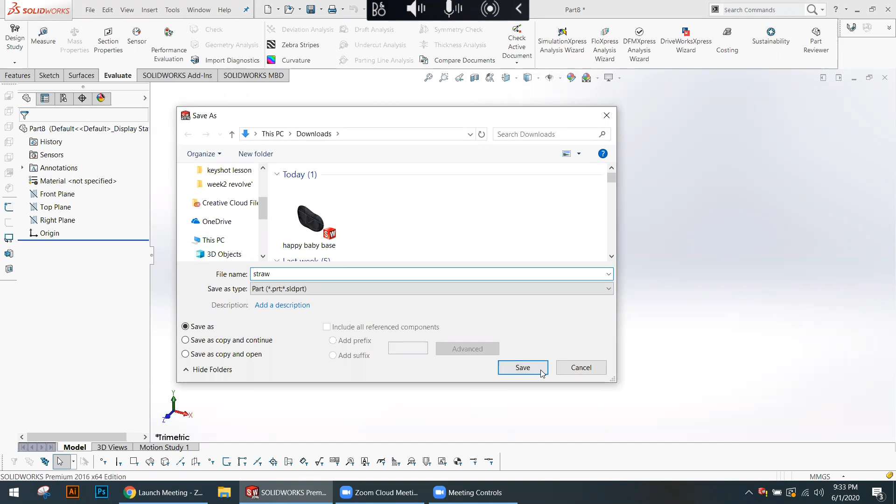Okay, so this is a simple sweep, just for you guys to get the practice of the basics. As we talked about it, we need two intersecting planes to build any sweep.

So we're going to start with our top plane and go sketch. This is going to be the base of our straw, which is a circular shape. And I click the origin, click out, and come back and measure this. Remember, this is a millimeter, so I would say the diameter of a straw would be about 5 millimeters.

So besides that, the sketch is black and defined, so we are done with the sketch. I'm going to come out of this. You can see sketch 1 is done. So now we need to build a sketch 2.

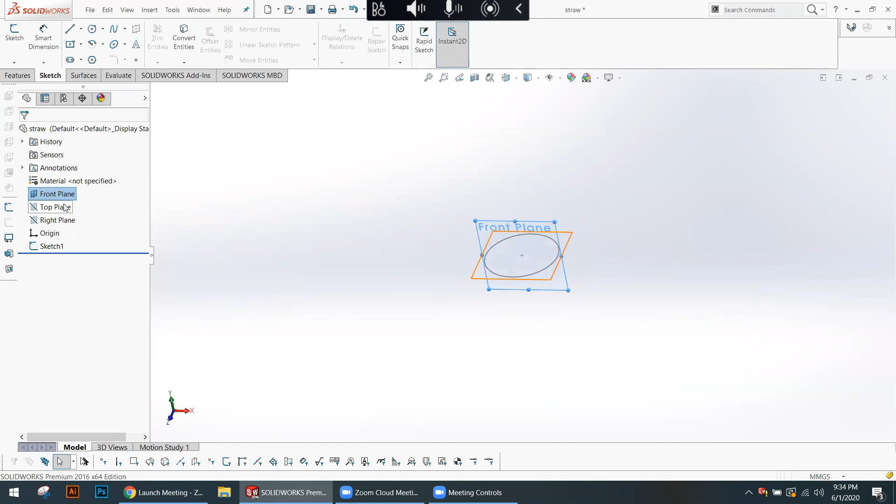And turn on these planes so you guys can see where I'm sketching. So we have our profile sketch or our basic sketch. Now we need to sketch a path on a perpendicular plane to our profile and tell the computer to have the shape follow that path. In this case, both right plane and front plane will work.

So we're going to pick front plane and click sketch. Notice this is sketch number 2, so separate from the first one. Press Ctrl 8, so I'm looking straight at it. And come use my line tool.

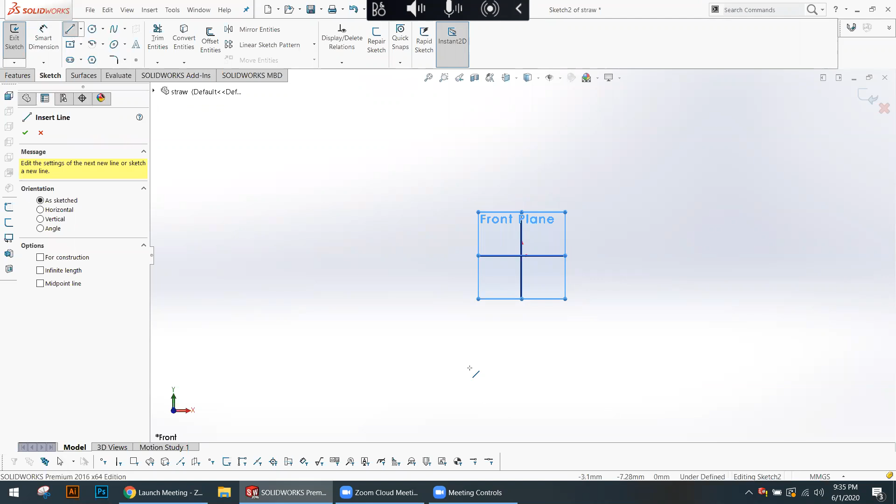The first point that you put down is the most important point. These two sketches need to have an intersecting point. So I use the center of the other circle as my starting point for the stem of the straw.

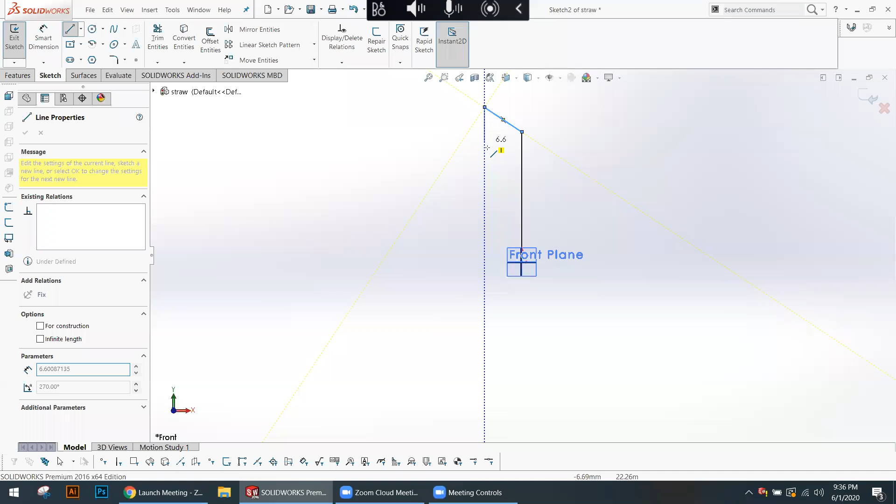I go back to Ctrl 8, so I'm looking straight. I go up, and the straw kind of bends to the side. So let's say, how tall is the straw? I kind of do this in inch because I know it better. Maybe it's about 10-inch tall.

So I can just write 10 and write IN, and the computer will calculate the millimeter portion of it. So you don't have to actually do the millimeter.

So it's a lot taller than I was expecting. Let's see, this is our base, this is our height. So maybe I will go with 8-inch.

Now also that means this portion needs to be a lot taller. And I put this one at... let's put it at 2-inch.

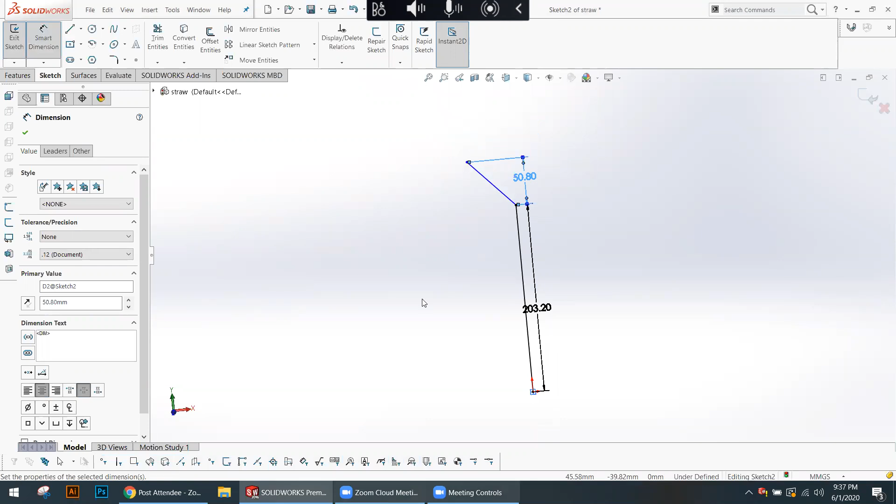Okay. Also, let's look straight at this. A straw usually doesn't have

a sharp point, so we're going to come in and do a sketch fillet here. Use our sketch fillet, I come in here. It's kind of small. We're going to go up with the number until it looks nice and smooth. Okay, that looks better.

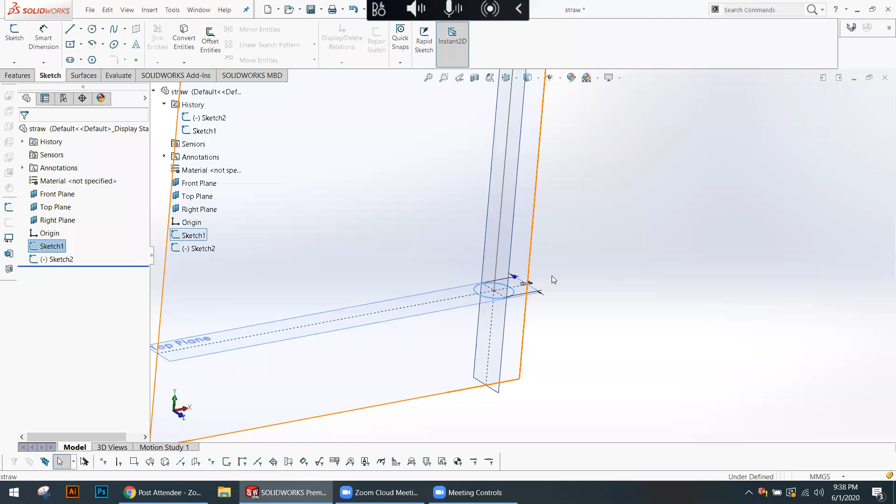So now our profile sketch is done. My bad, our path sketch is done, and we're going to finish and completely come out of this one as well. So if you notice, we have sketch 1, which is the circle right here. And on a perpendicular plane, we have sketch 2, which is that path.

Now that we have these two, we can make our sweep. So I'm going to go to features. Here we go, sweep is the third option on top, sweep boss.

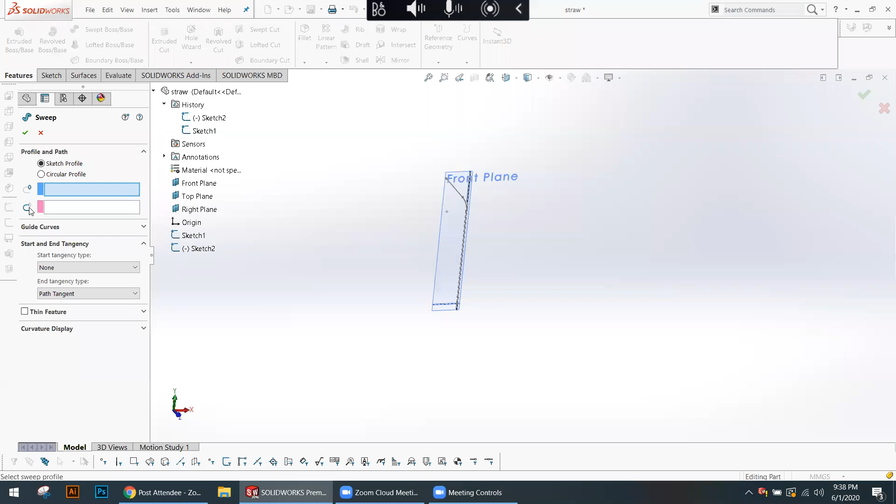And click this. As you notice here, it's asking you first for profile, right? This is the profile, this is path. So I'm going to pick the profile. Okay, now it switched into the path. So now I'm going to pick my path.

And as you can see, the sweep is built. The base is following that path and making the shape. So this is a simple sweep. I'm going to say OK.

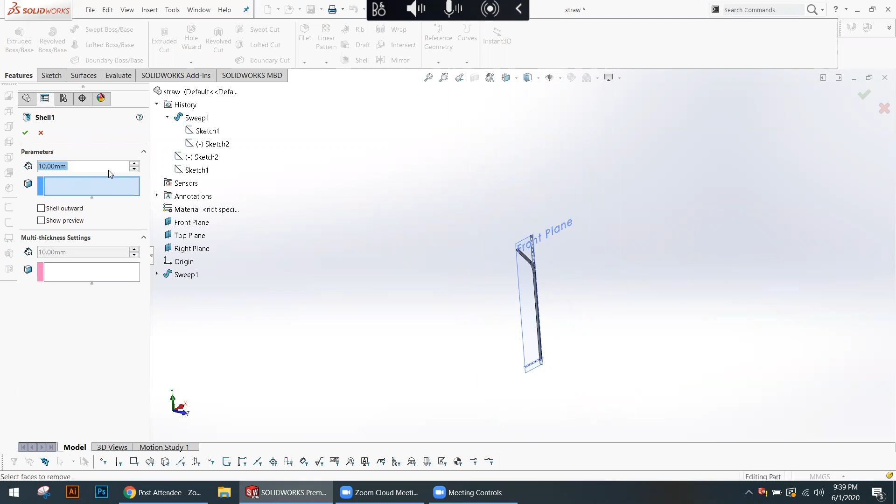And here's our straw. If you notice, this straw is filled, so we need to come back and shell it. So I use the shell tool. This is 10 millimeter wall thickness. It can't work because our whole circle was 5 millimeters.

So let's put the wall thickness at 1 millimeter. Click show preview. So right now it's hollowing it out but leaving the top and bottom in place. But the straw does not have those.

I'm going to select this top. Now you see the cut comes to the edge. Also, I'm going to select this bottom. So now when it cuts, we're going to have an open top and open bottom.

1 millimeter may be too thick, so I'm going to go back to 0.5 millimeter. That looks more similar to a straw.

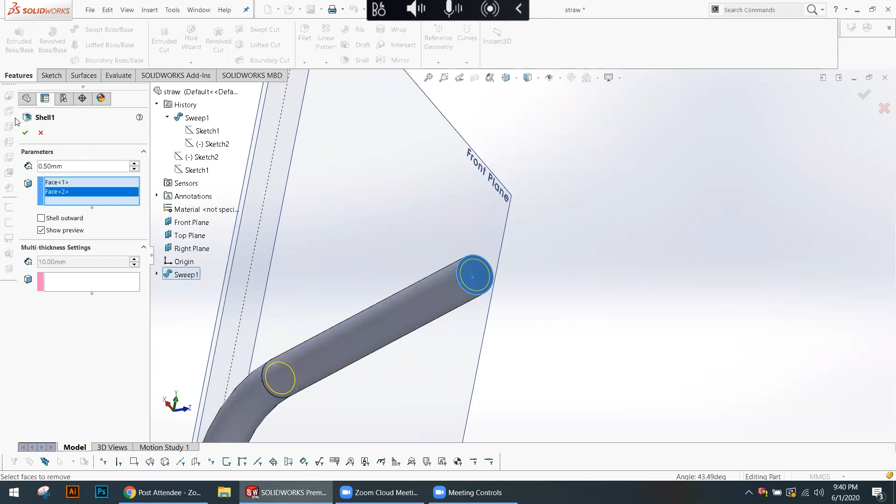Okay, here we go. So now we have the hole, and if you always like to double check, you can use your cross section tool and look inside your form, which is a great practice. Okay, it looks correct, and we are done. So make sure you save your file.

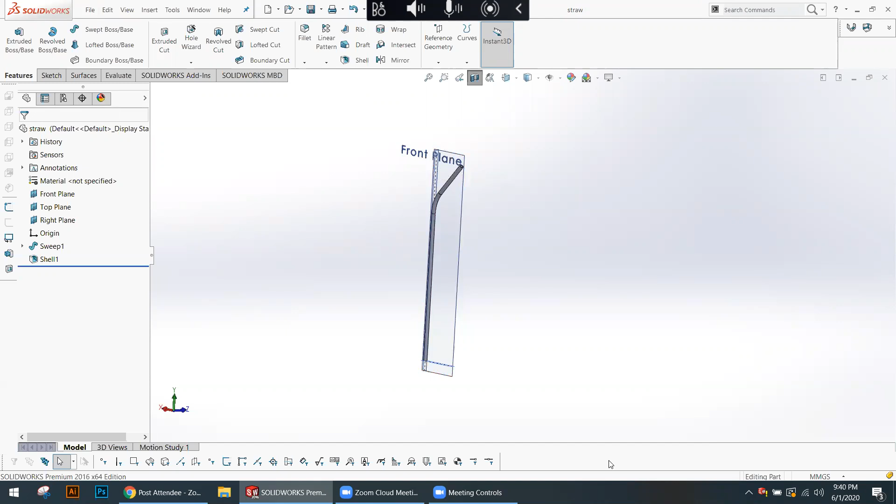Okay, so next lesson, we're gonna do something a little bit more complicated. We're gonna build a teapot.

So let's start a new file. Go to part. Check the measurements again. Okay, it's an inch, we'll stay in inches. And with this one, we have a picture to bring in. So I'm gonna go to front plane because we have a side view picture. And click on front plane.

Go sketch. I'll bring the picture in, it's easier to understand what we're doing. So sketch. Okay, so we are in the sketch mode on the front plane.

As before, go to tools, sketch tools, sketch picture. So we're going to look for our pictures. Here we go, this is the teapot we chose. Open. Okay, this may come in humongous. All right.

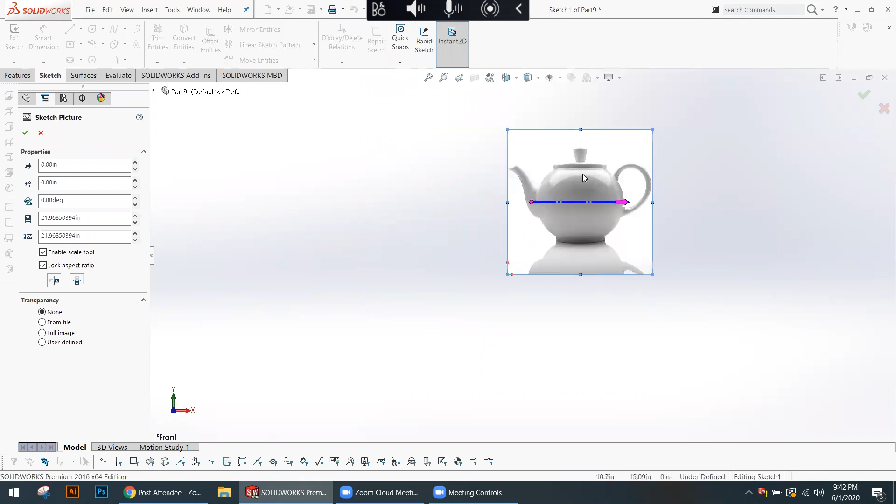So just looking at this image, we know this base part is going to be a revolve. This handle is going to be a sweep. This is going to be, for now, a sweep, but a better way would be loft, but we're going to use sweep. Also, that top is going to be a revolve. So we're going to start with this base part and build our revolve through the center.

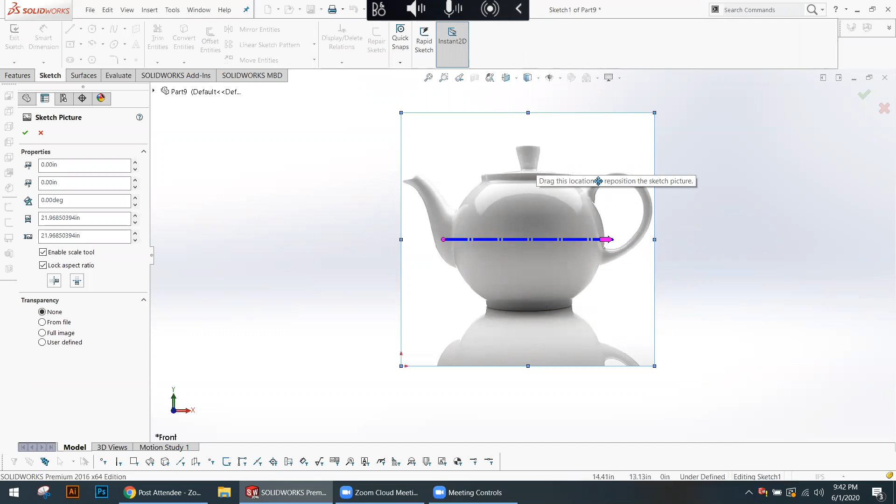To do that, we need a center line. So I'm going to check this. I'm going to come in and draw my center line. Okay, and measure it.

So a teapot is about 6 inches tall. I'm guessing it might be 7 or 5. So we're going to go with 6 inch. This is the reason why I came out of the image and measured my center line, because I wanted to know how to size this, since we need an actual measurement to figure out the correct size.

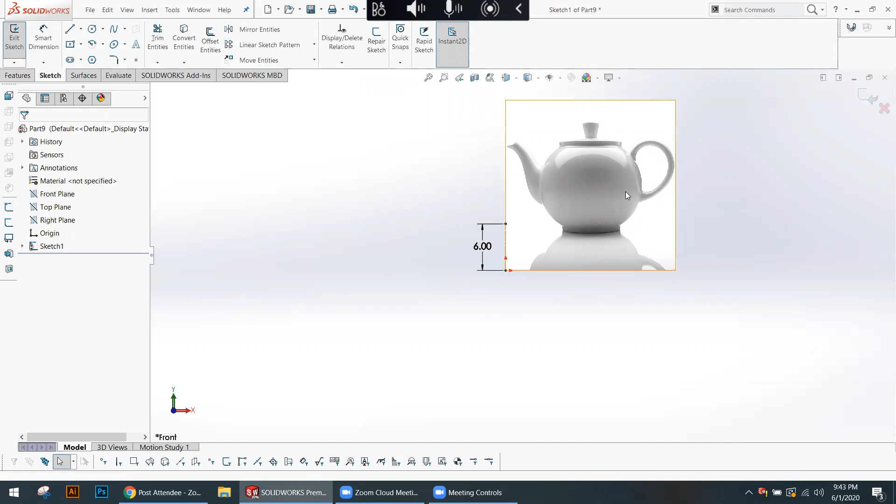Now I go back to the picture, I double click until this blue border shows up. Now I can move it. I want to try to center the teapot, grab the corner, make it shorter, a lot more.

So I'm measuring up to the top here to be 6 inch. Let's see. Okay. Okay, now I gotta go bigger. Okay, that looks about right. And say okay.

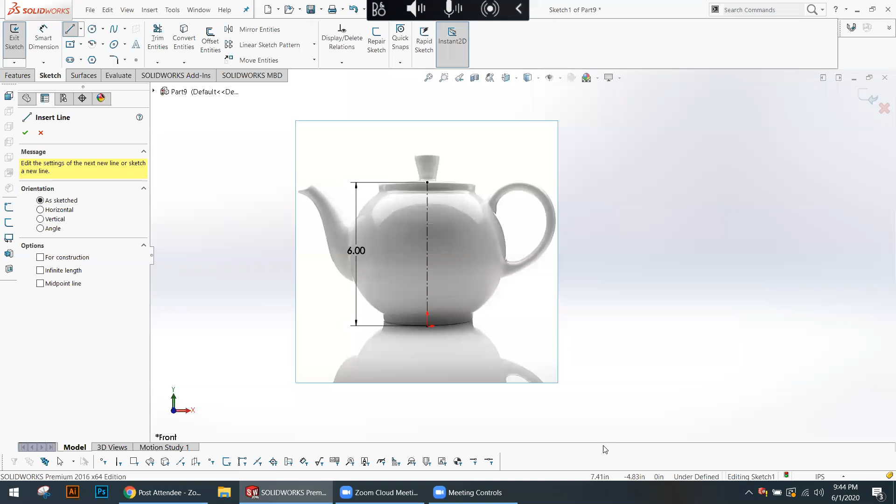Now our first move is to build this revolve. So flat on the bottom. As you notice, this is not 100% side view, there's a little bit of tilt in there. So I did the base, I came up a little bit for that. This looks like a very nice arc.

So I'm just going to use the arc tool, which we have here. I'm going to use a 3-point arc. We click on it. You guys remember a 3-point arc has 3 points: first one is the start of the arc, second one is the end of the arc, third one is basically the radius. So we'll start with that.

First, second, and this is the radius. So we're going to try to get as close as possible. Say okay.

I move this image down a little bit because I think that's easier to work with. Go up a little bit. So we may need to adjust things here and there, but because I had it at the bottom, there was too much curve happening there.

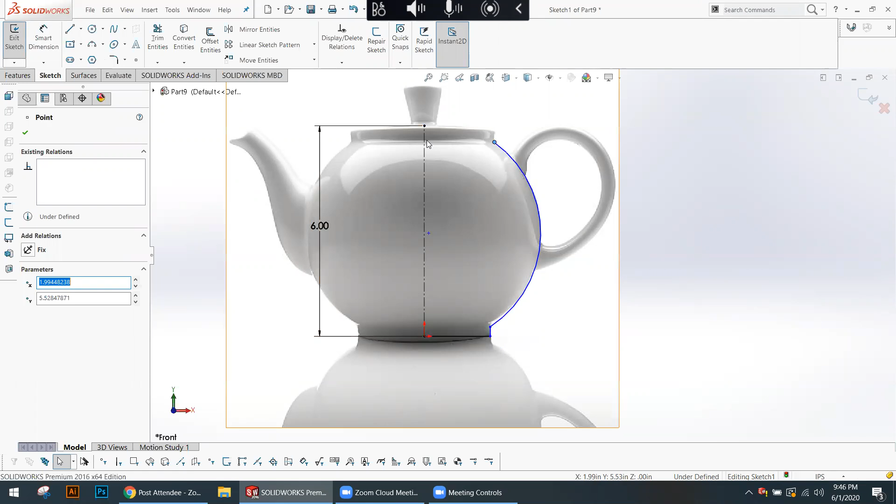These two kind of seem above each other. No, the base looks smaller than the top. I wanted to put a straight line here and make them even, but now that I pay attention, the bottom looks smaller than the top, so I'm going to keep it as is. Try to finish the sketch. Okay.

Here, and we're not going to close because this is hollow, we all know that, so I'm going to leave it here. Because this is hollow, we're just going to select one line and use the offset entity, so it offsets on the outside. Let's click reverse, make sure you have select chain on, so rather than just doing this one piece, it will do the whole thing. I click reverse. All right, that looks good.

0.1 is the measurement. Let's do 0.15, see if that looks better. It still is a teapot, so it's going to be more hefty. Okay, remember the sketch is not closed yet, so I have to come in and close this and close that. Okay.

So something I'm noticing here, before I go ahead and finish the sketch, I notice there's this cap that's sitting here. That means there needs to be a notch right here to hold this piece in place. So I need to come in and add like a tiny notch right there. I can just use my circle tool like that, so this will create a little notch. You could even go make a box like that.

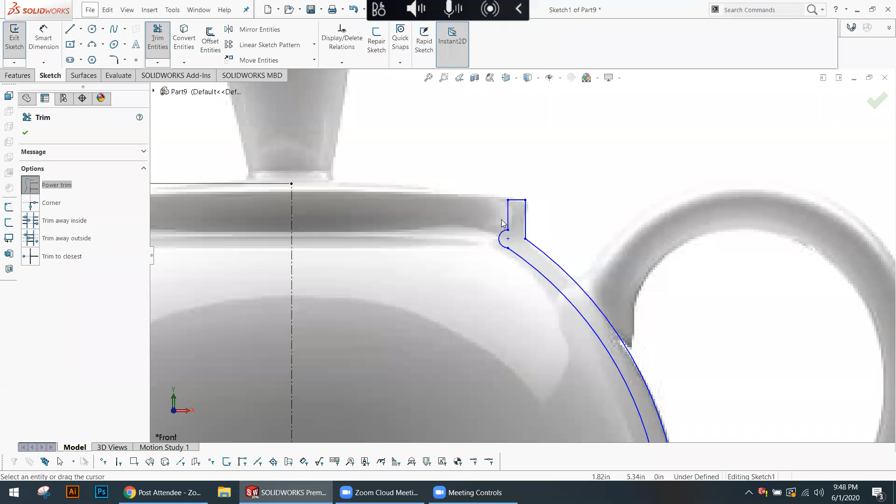Let's trim the extras. I went to the scissor tool and clicked power trim on. I click outside of what I want cut, hold down the mouse, and draw a line right on top. We wanted to get rid of those two, so now we have this tiny notch that will go all around and hold this piece.

We are ready for revolve. Feature, revolve. It's asking us which one is the axis. It's this one. And here we go. So it's open on the top, closed on the bottom.

Okay, nice, exactly as we want it. Let's select this to show so we can build the rest of that. So if you pay attention, this handle right here, that's a sweep, right?

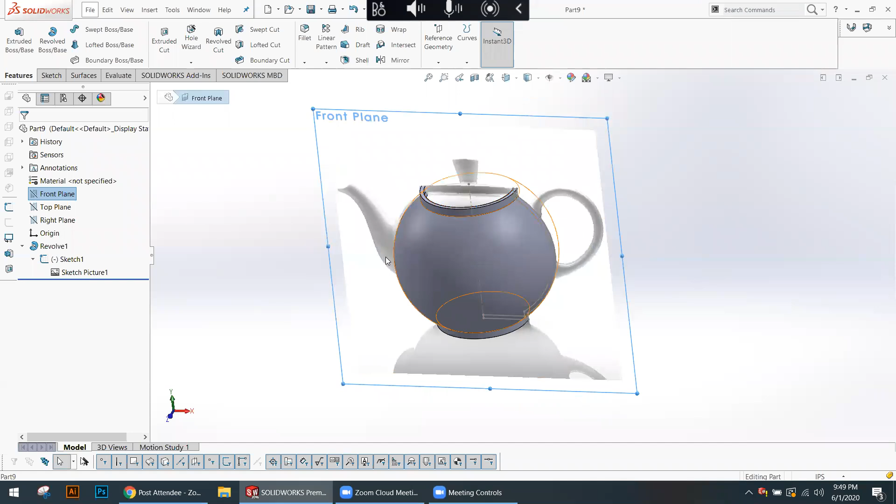But this sweep starts somewhere here, so if we have our profile sketch somewhere out here, we can do a path on our front plane because the front plane is going through the center. So we put our path on the front plane, but our profile is a plane that's perpendicular to that. Something similar to the right plane, but the right plane starts right in the middle here, and we don't need that.

So we're just going to start building a plane right on this space. To build a plane, you go on features all the way to the end, to reference geometry, drop down menu, and the first thing is plane.

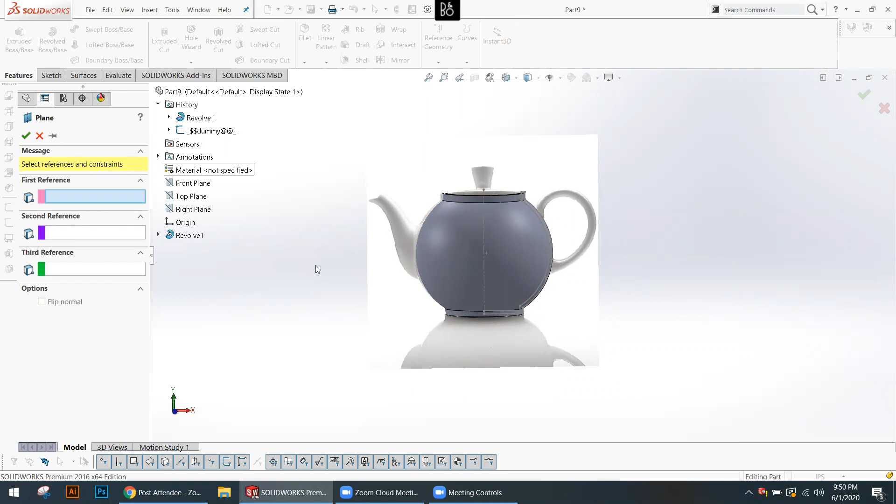When you want to build a plane, it needs a minimum of 3 references to pick that plane. We know this is going to be parallel to the right plane, so we're going to select the right plane. Then rather than give it a couple more references, we're just going to say it's parallel, and we're going to give measurements.

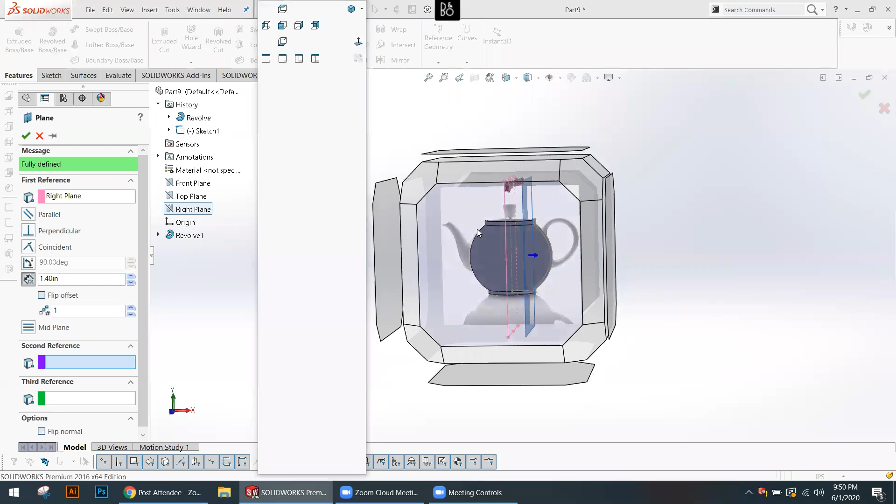Here is dimension, this is angle, this is dimension. You can pull it out to where you think it's right, or just go up with the spacing. If your plane was going the wrong way, you just click flip and it goes the opposite way. Keep going. We're looking to get about here, because we need to start here, come out, and come back in.

This part is okay, we're not worried about it because our path will go all the way back in here. But this profile, which is a circle, or I'd say more like an ellipse, needs to be all the way inside of the body. So maybe that looks about good, so it's 3.1.

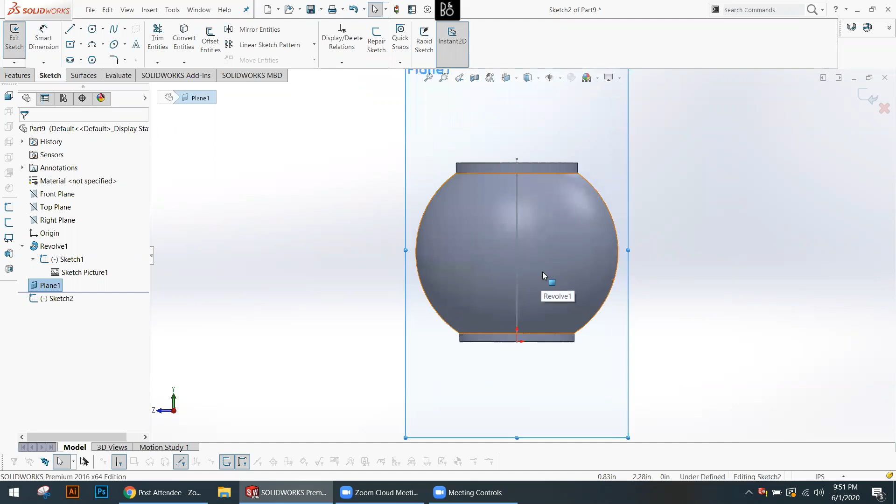I say okay, so we built a new plane that we can sketch on. We select this plane, say sketch, and press Ctrl 8, so we're looking at it straight. It's weird because we can't see the image anymore, but we can always go back and forth. We know that handle is more like elliptical.

We can go to the ellipse tool here, click the ellipse. You see this is the origin, so we're going to make sure we're on the center. I click, come to the right. If I go to the side, this ellipse is not going to look horizontal, it could be in a diagonal. So I click once, that's the major axis of the ellipse, and click the second time, this is the minor axis. Then press escape to come out.

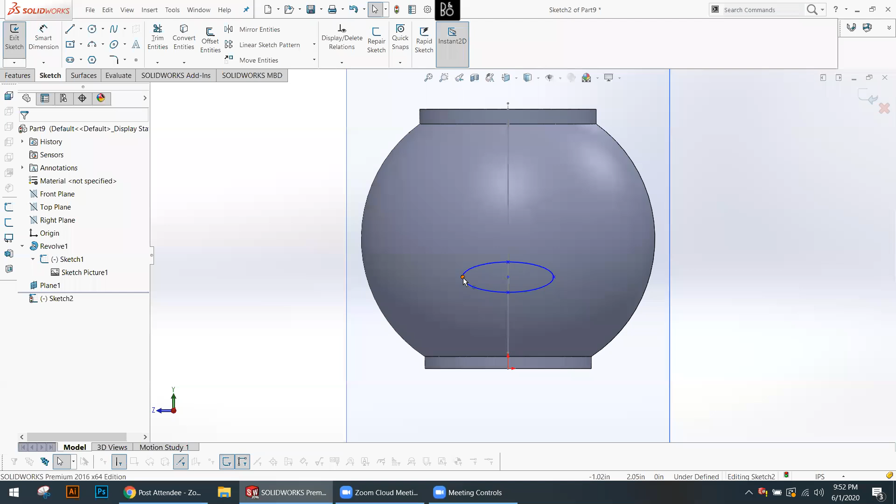So this will rotate, it's too flexible, it's open, so we need to come in and define this. I'm going to click that dot and the right one. I held shift, so I'm selecting both. On the left, we're going to put it horizontal, so now it will stop it from rotating. Say okay.

And come measure the center to the bottom. Says 2 inch, so I'm going to cheat a little bit. I want to rotate to the side, and look, all right, we need to be a lot higher. So maybe this should be 2.15, let's see, maybe even more, maybe 2.25. Okay, that looks good, I'll go back to my view.

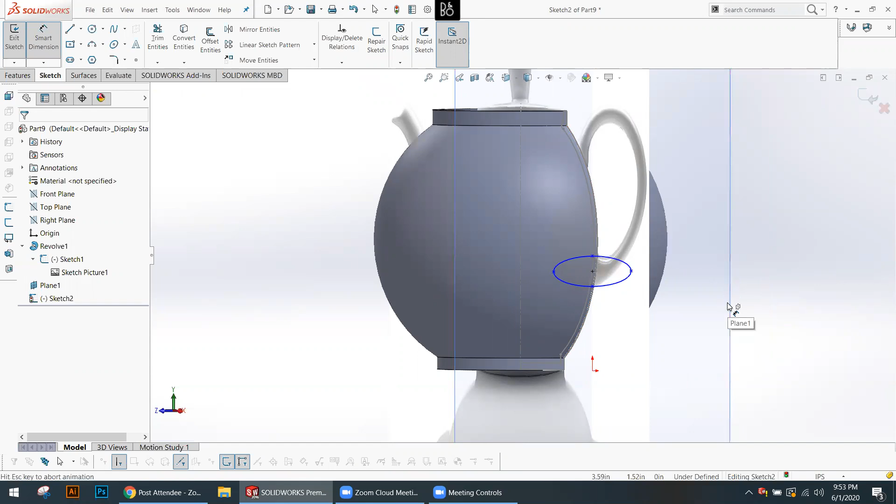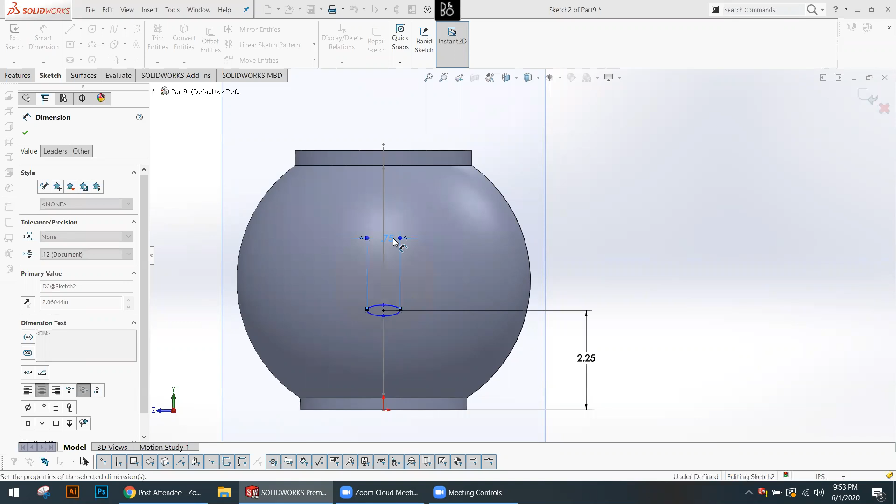This is pretty large, so we're also going to measure from that point to that point. Think of a handle of a teapot, it's about maybe less than 1 inch, maybe 0.75, like 3/4 of an inch. But it's definitely a little thicker than this, maybe 1/2 inch thick. Okay, let's look.

Don't worry about this thickness, this is a fillet that's going to come in. So we're looking at this thickness right now.

Okay, I'll go 0.8 on this one. It looks more elongated, maybe even 0.85. Okay.

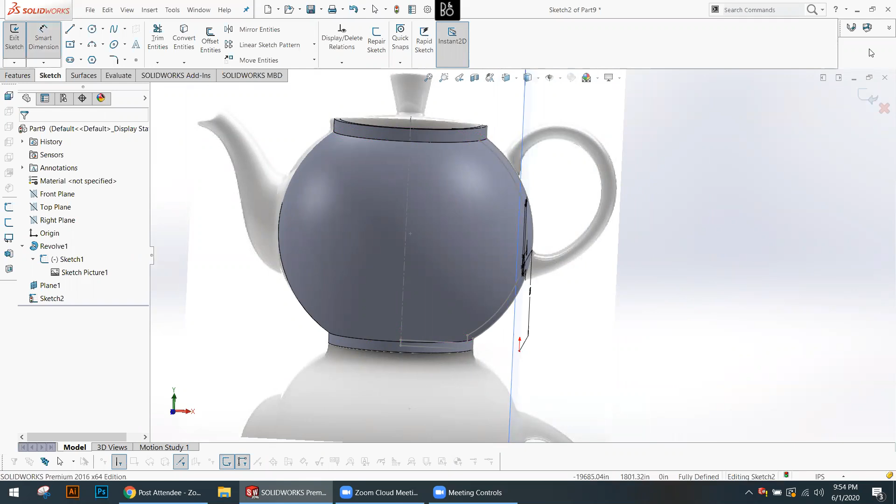That looks good. We're just going to leave the sketch here and come out, we're not using any feature on it. So that sketch is on plane number 1 - this is our sketch 2 on plane number 1.

Now we find the perpendicular plane to that sketch. So this would be our perpendicular plane, and it's going to follow that path and connect to that circle.

So we go on the front plane, we say sketch, Control 8. This time we're using the spline tool. Select the spline - remember, your first point needs to connect the sketch of the profile to the path. So I'm rotating a little bit.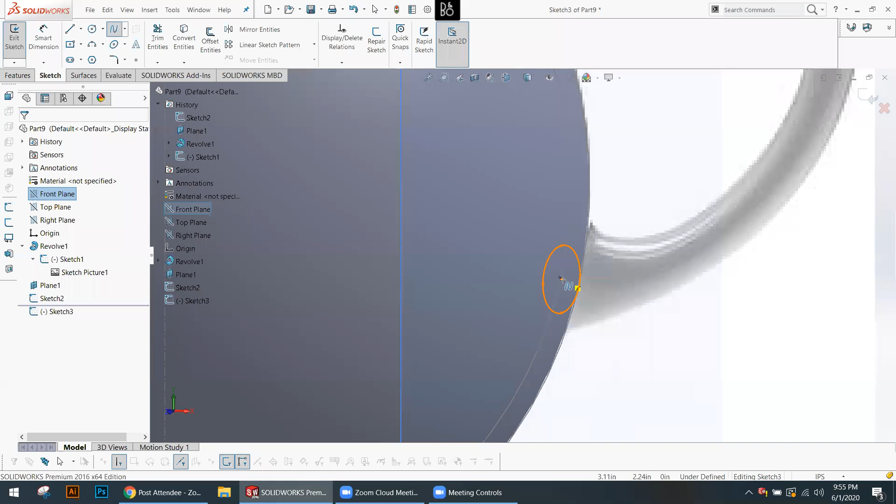By zooming, you guys see this ellipse? Stand on it - here we go, here's the center of it. So the first point you're clicking is the center of that ellipse.

Okay, and I'm going to zoom out and press Control 8. Now I know it's connected, so all I have to worry about is following this form.

Make sure you don't stay on the edge - you're going to come in because we need to fillet around the edges. I'll get rid of the axis later. Come in, press escape, and use these handles to make this more similar to the shape that we see.

And we're down here. Okay, that looks about right. Notice I'm in the center of this shape because I selected this path to connect to the center - that's why I'm trying to build my path through the center and not an edge on either side.

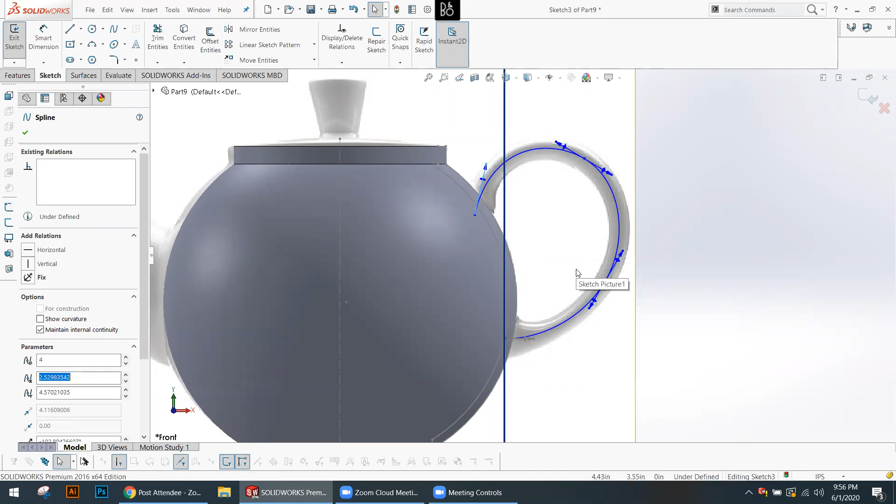Looks good, we're done with sketch. I want you guys to see - here is our path, here is our profile.

So now that we have the two sketches, we can go to features, use sweep. First question is our profile, which is the ellipse. Second question is the path. Perfect - all right, so we have our handle done.

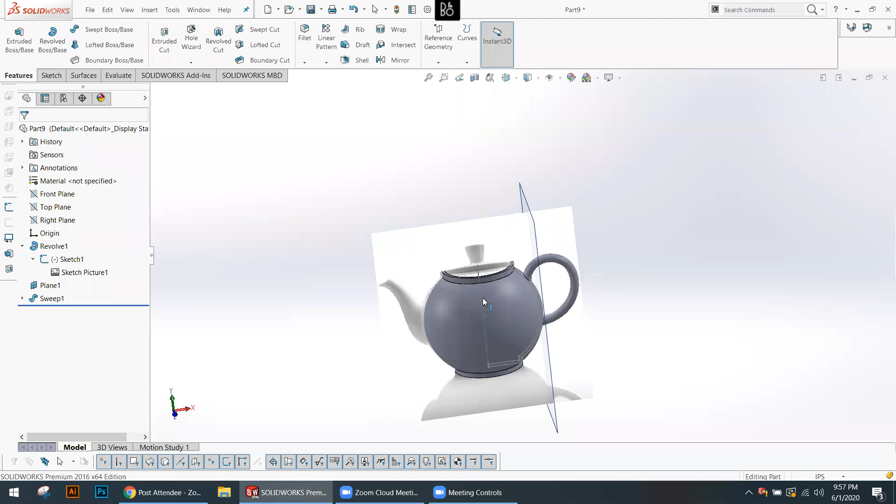I know this is sticking on the inside, I'm gonna come in later and fix that. We'll do the same thing on this side as well, but let's make the top piece for now. Going to go on the front plane.

Okay, I'm gonna cut this shape because I want the top to fall in there. Can I say okay? Did I say okay? Yeah, it just doesn't show because the picture is covering it, but it's okay, this gives me enough information.

Since this is also a revolve, we're going to use a center line and our line tool. So we're basically just going to come in. Okay, maybe I should have gone higher up a little bit.

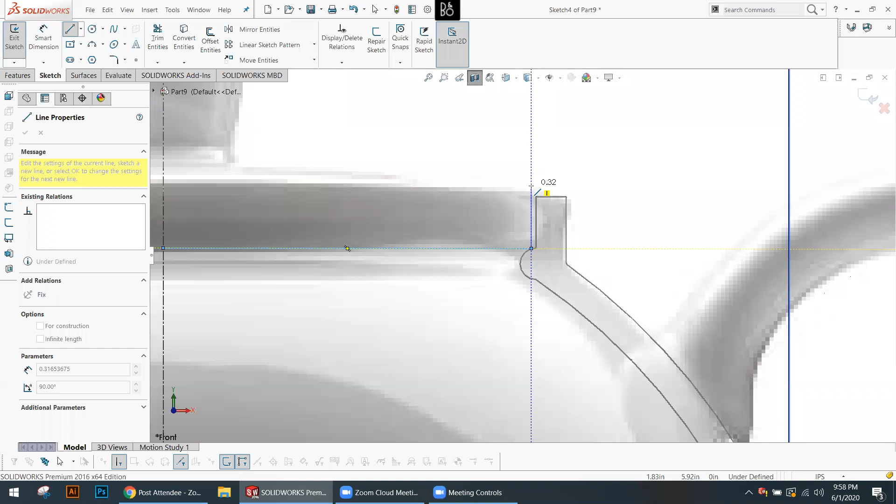It's okay, we'll use a fillet down here. And you can make it flush if you like, or go a little bit above. Okay.

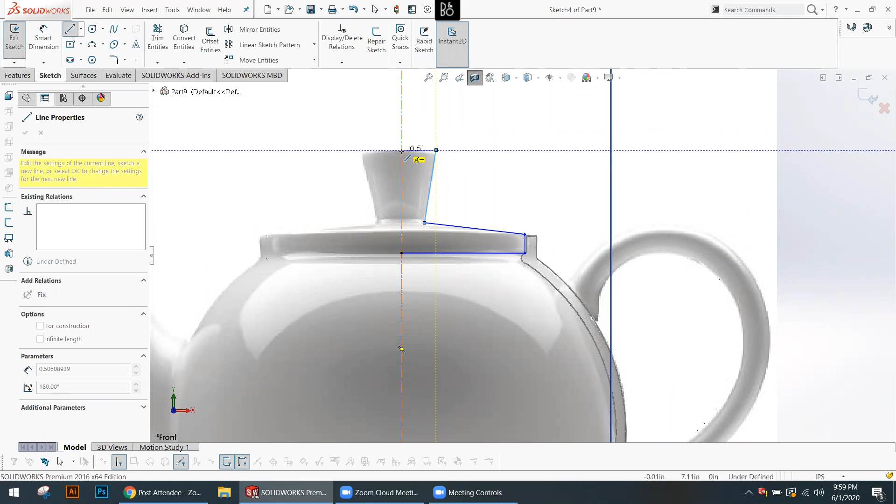Here's this. And that looks flat to me. Okay, all of these need fillet, but before that, I'm going to measure

from center to here - it's 1.82. Okay, from this point to the center, 0.34, and maybe this top one, not the angle, just the height.

Also the height of the whole thing. Okay, so this gives us enough information to go by. You could also do this angle if you wanted to.

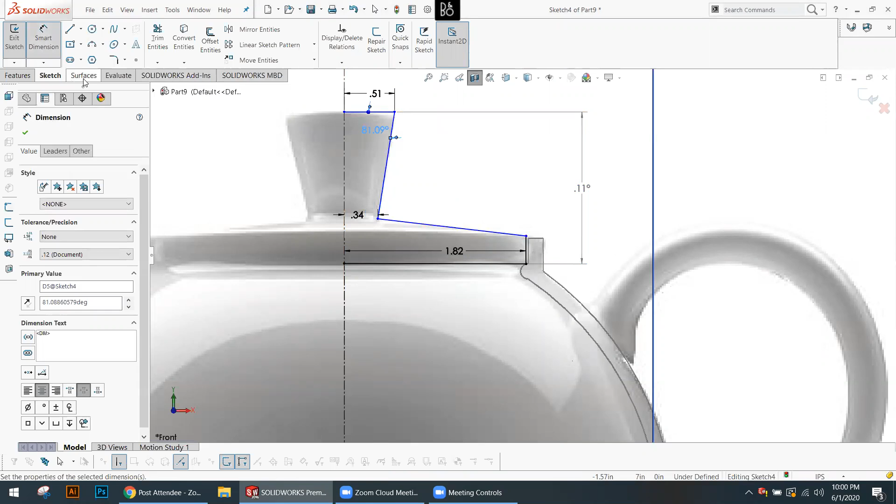And now use the fillet tool to smooth out. You can do this also after you do your revolve, or do it here. Okay.

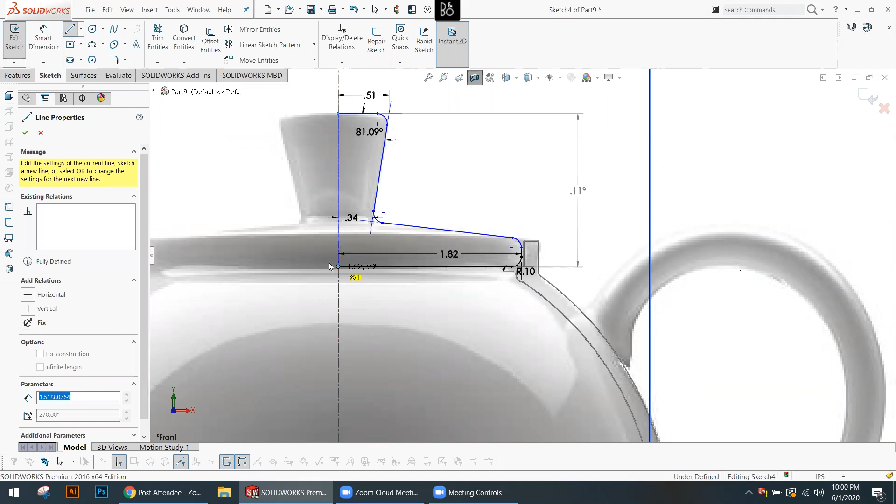One thing you notice, I forgot to close my sketch, so I'm going to come in, click and close the sketch. Now we're ready for our revolve.

Okay, very good. Say okay, and then come out of this cut so we can see. All right, almost there - we only need the spout.

So we'll do the exact same thing we did for the handle for the spout. First thing we need is to build a plane here, build our profile, and then use a perpendicular plane to build this path shape.

So another way to build a plane, let's turn on our right plane to show. A quick way is to go stand on the edge. When you see these 4 arrows showing up, hold down your control key on your keyboard, click and drag.

There will be a little bit of lag time, so you just have to be patient with it and wait for the second plane to show up. Then you can let it go.

So again, what we did was we went to the edge of the plane. If you're in the center and nothing shows up, you need to go to the edge and wait for those 4 arrows to show up. Hold Control on your keyboard, click and drag while holding Control.

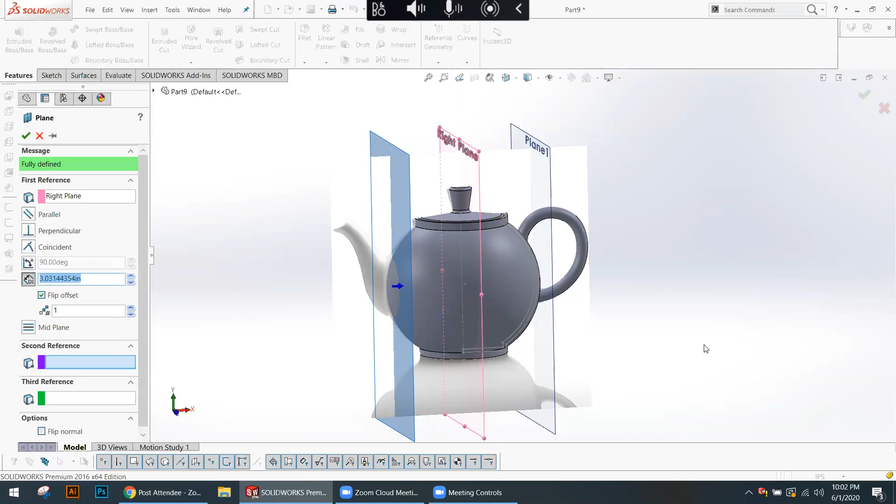And I think that looks about right. Let me look - yeah, that looks about right because it has to go all the way in here. Okay, say okay.

So we have plane number 2. We're going to use our sketch - this is also an ellipse.

Other way. So I'm still using the center as a guide. I'm going to click—maybe here is the center of my ellipse. Go up, click once, and click again. Okay, same thing as before. We're setting these two points, holding shift to be horizontal.

Then I'm going to measure this—1.5 for now. I'm going to rotate a little bit to the side using the arrow key on the keyboard. Again, I'm really low, so I need to go up, going back. Let's measure from the center to the origin. This is 2.36—let's do 2.5.

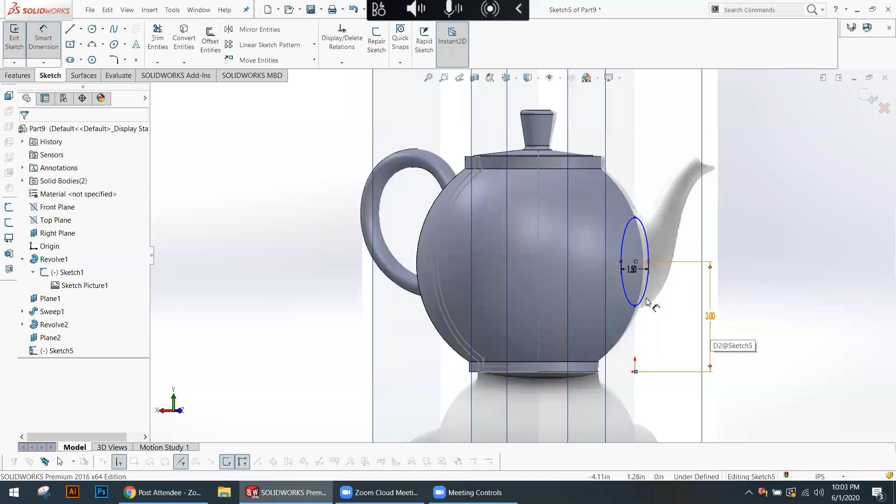Okay, looking good. Maybe even more—so maybe 3. That's much better. And the height actually looks correct. Let's see, and narrow this down a little bit.

Here, here. 2.25, just so it's an even number.

Okay, so Control A. One thing we just need to talk about—this is thicker than that, I know, but with sweep we're going to have the same thickness all throughout. So we're just going to accommodate for the fact that this is a sweep and we're not using a loft tool.

So as it follows through that S-curve, it will get smaller, but it's probably not going to get that small. So I'm trying to go smaller here a little bit and a bit bigger here—just to be somewhere in the middle, 2.5. Okay, that's better.

Okay, the sketch is also done. Here it is—it's sketch number 5. And as you know, we're going to have to build the path for this now.

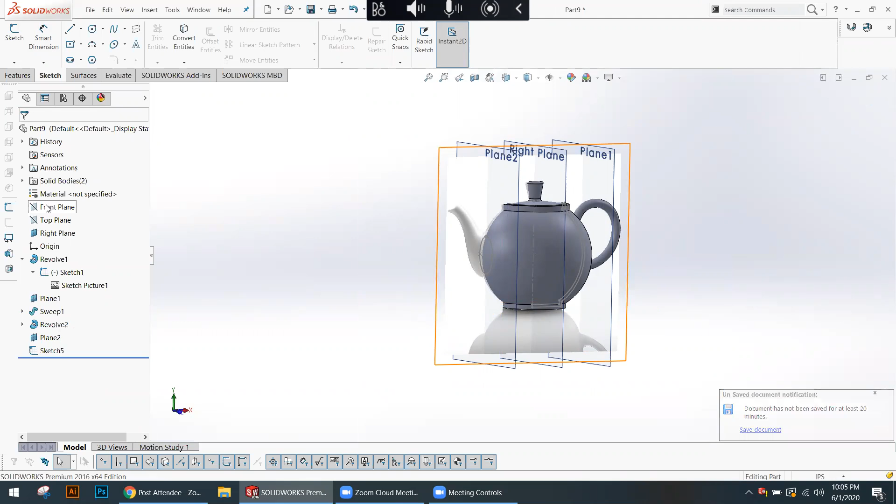So I'm going to use a perpendicular plane, which is the front plane here. Here you see it's crossing that. Say sketch. Okay.

We're using a spline tool. As you remember, the first point needs to be the center of this ellipse. Here we go—so we have to rotate a little bit just so we can see the center. Here we go, right click. Now press Control 8 so I can go back to this. All right.

Something like that—notice I'm going past because we're going to have to come in and cut this shape, so I'm going beyond that. And maybe a little bit higher this way. Okay, if you have really sharp points or curves, the computer may not be able to follow this shape through that path and will give you an error message.

So you need to make sure you don't have super sharp turns. Okay, maybe that's better. I don't know how it will look until I try to sweep. Coming out of the sketch, we have our path and profile—going to feature, sweep. There we go.

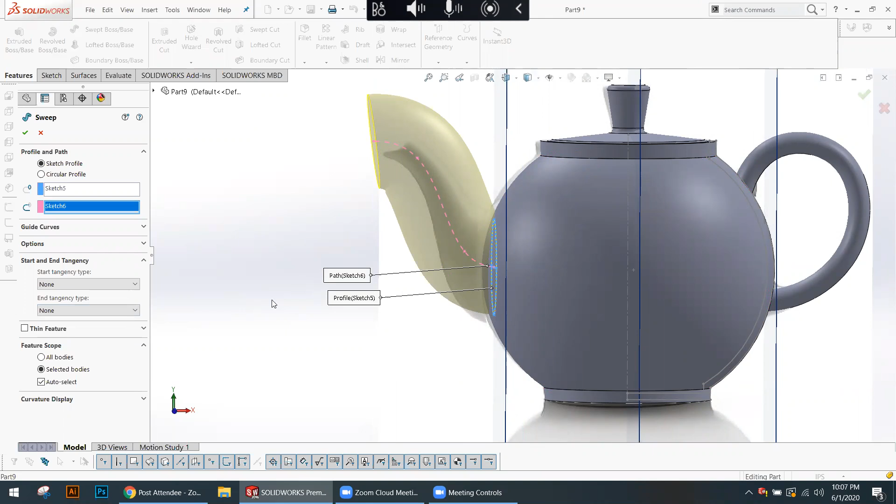Ooh, this is chunky. Okay, so this is way too large, so I'll go back and make it a lot smaller. And also it's going a bit thicker than I expected. Okay, we can always go back and thin this up and see what happens.

Another option we want to talk about—we know this is hollow, right? So we could always use this thin feature. The thin feature will build a hollow shape. But I think right now my curves are too small for that path and it's having a problem with it.

So let's go back to my path sketch and edit. All right, so this needs to come out more. Maybe—there we go. I have to just change the shape just a little bit, so it's able to... maybe I'll just go straight up this one. This is still a sharp point.

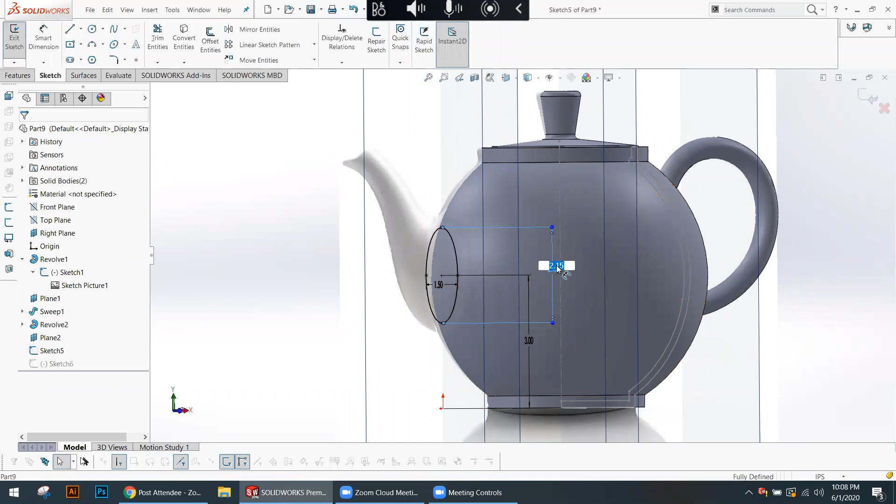I edited that. I'm also going to come edit the sketch and make it smaller—make this 2-inch tall, maybe make this 1.25, so it has an easier time following that path. And some of this we're going to get with the fillet, so it's going to add thickness there.

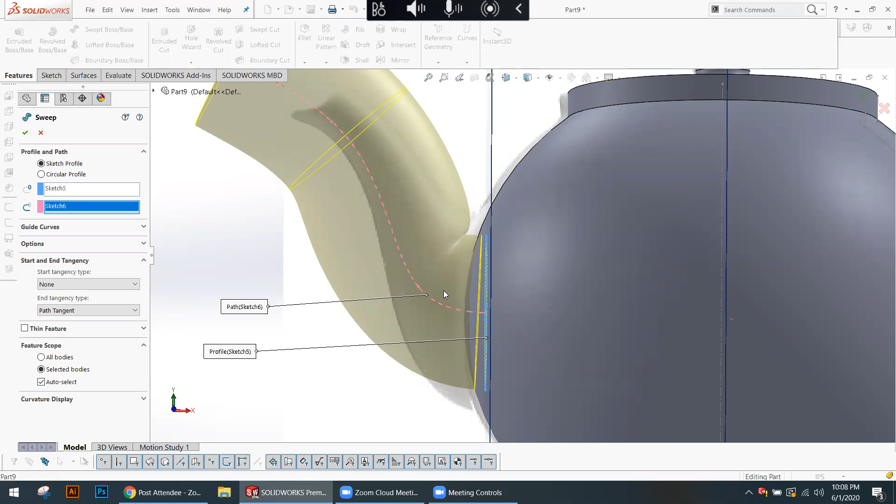Let's try this now. Sweep. Path. That. Okay, this is too sharp—you guys see how there is a pinch? I have to come in and bring this lower. The rest of it works out.

It's still gigantic—I'm going to go a lot lower with this number. Okay. A simple way to edit your sketch is to double click on it and it goes into sketch mode. So here, from the 2-inch, 1.5. So actually going really small now, and this is going to be 0.75.

Because I put the center at the correct place, every time I'm switching these the center is not changing, so my connection to that path is not changing, and we can update as much as we like. Okay, now I'm going to double click on this.

So I had an issue here—it was too sharp, so I'm going to open that up. Let's see what happens, maybe it will work, maybe it won't. At this point, we don't even need this third one. Okay, let's try it again. Sweep.

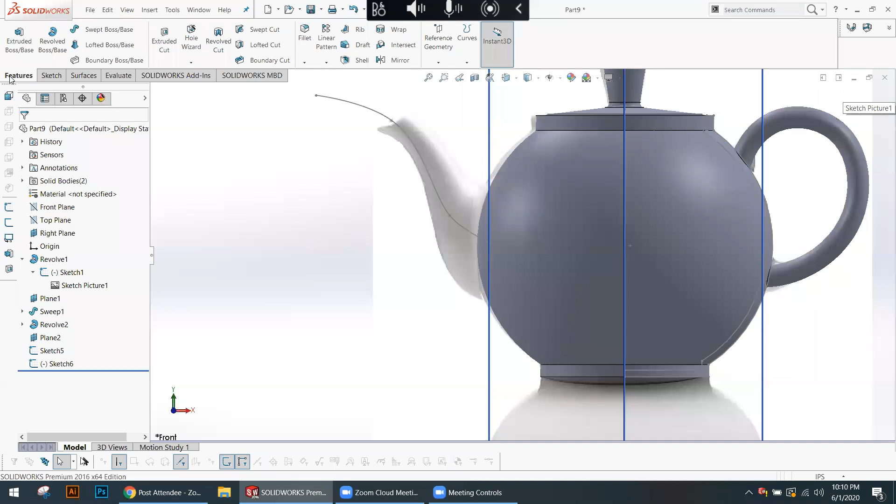Okay, it's better, but there's still a kink here. Let's go—yeah, I can't go up here. It almost needs to be just very smooth. This time, there's a small handle here. Maybe I can play with that.

Okay, that's definitely too sharp. I don't need this many points. At this point, I'm just going to delete one of these points. Maybe I'm not in the sketch mode.

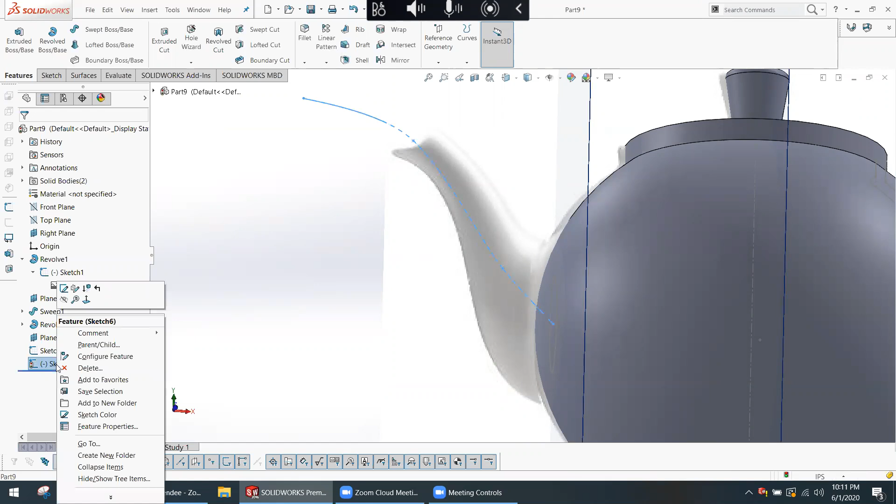I came out of a sketch for whatever reason. Okay, now we're in here. See? Okay, now that's deleted. Can use this. And bring this lower, and bring that lower.

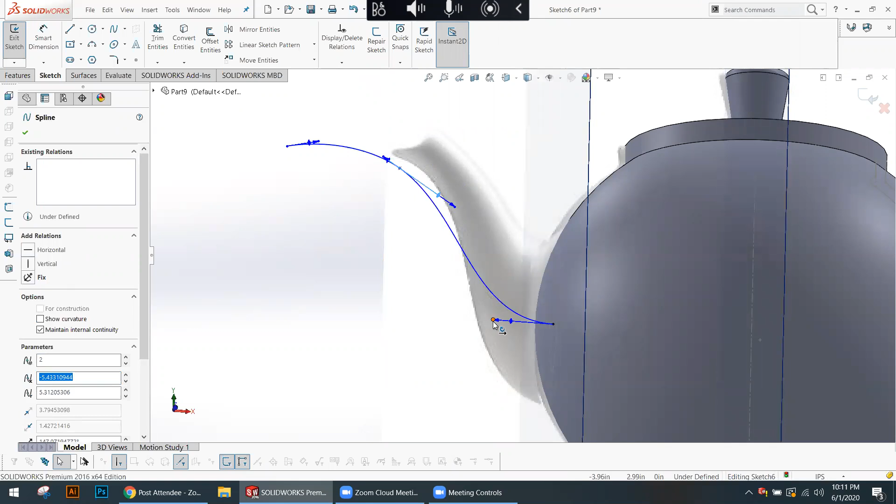And let's see what happens now. I know we're not following that, we're just coming down a little bit more. But hopefully this will work. See? Sweet. Okay, much better.

So we're gonna have to come in and cut it somewhere here and make it thicker here. This is still a little bit larger than I would like. I'm gonna say okay to this.

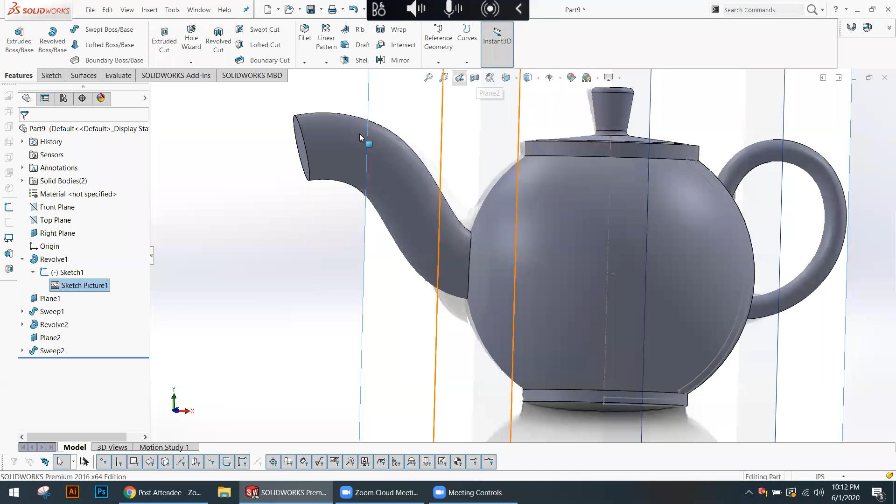Now to cut this part and look at the section view. So we're just gonna come in, you can see this, come in and cut, maybe something like that.

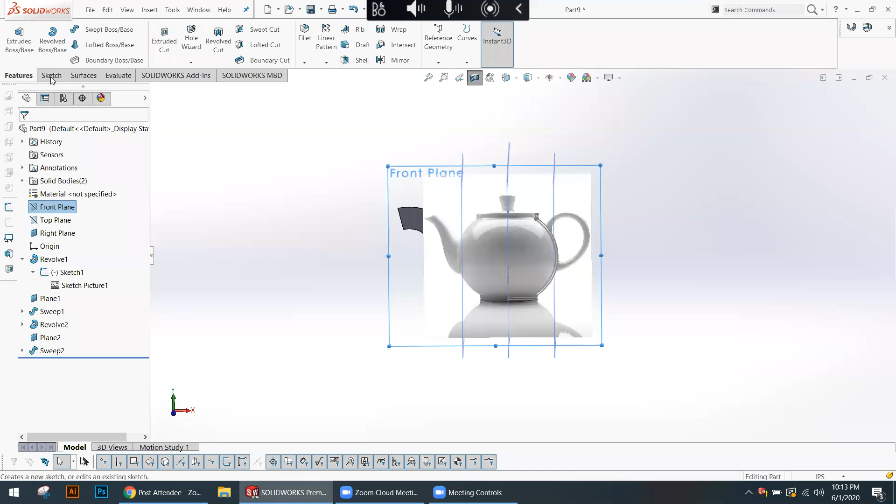So to cut this way, we need to use our front plane. Sketch and use our spline tool. If you can see, this kind of curves and goes out.

So ours is, let's rotate, it's like this. I come cut the top, maybe from here, and go out. So I use 3 points. Use this, go a little bit this way to match the lip looking thing.

Okay, this is curving in too much. Come in, smooth this out. Okay. Hopefully this will make it look a little bit smaller. Again, we're using not the best tool to build that form, and we knew that from the beginning, which is okay.

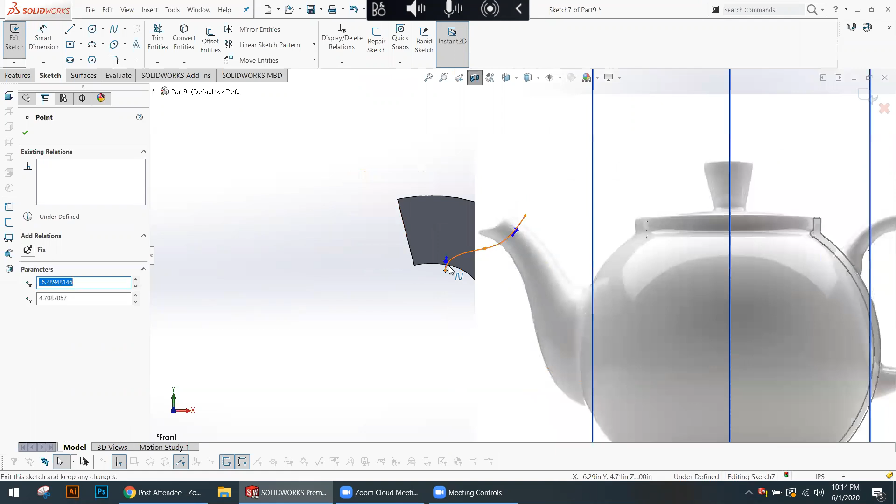Okay, so this is going to be my cut line. So I'm going to come on this side and look at this cut line. So maybe if I go down this way, here we go, that would actually look better. Okay, we'll do this. There we go.

All right, so this is a cut line, but my sketch is not done. You have to come in and make a closed path that contains all this top portion in it. A good practice is to still put a little bit of measurements so it won't collapse on itself.

Okay, I'm done with this feature, extrude cut. So for this one, we're going to use mid plane so it cuts on both sides. Here we go. Nice.

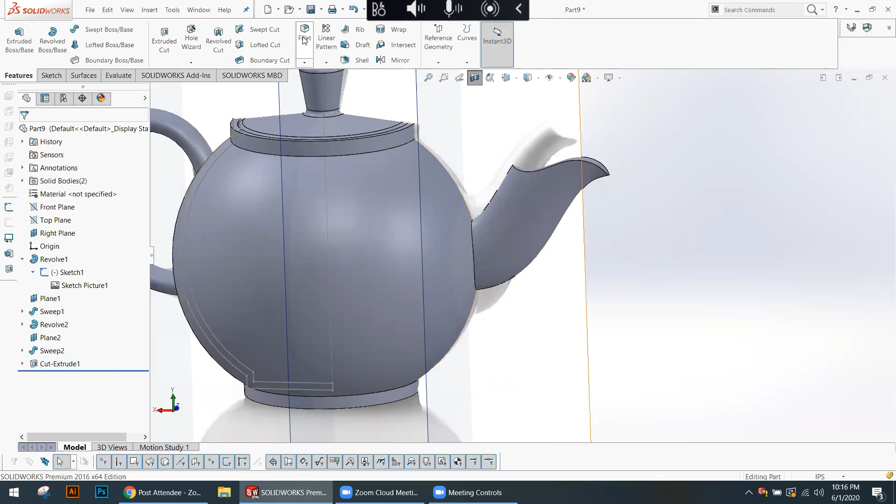Okay, and another part is to put like a good fillet down here, a lot larger, so it'll help our shape to be similar. That might be too large. Let's do 4. Okay.

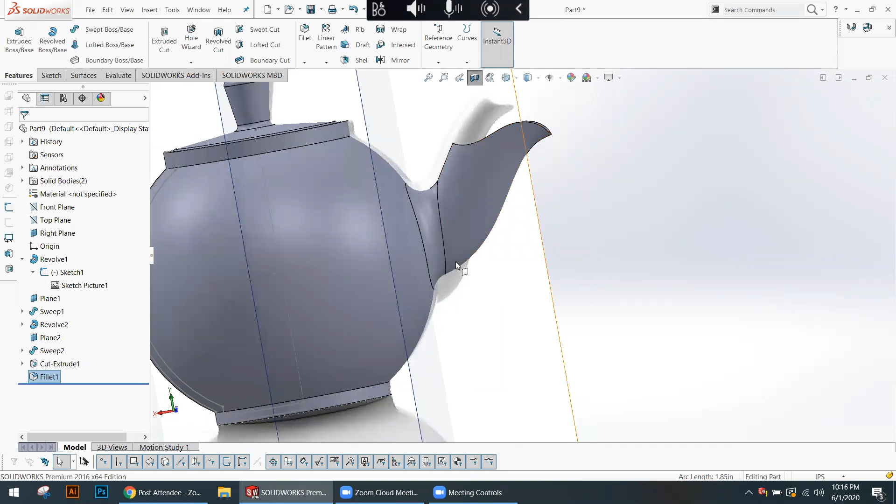I want to go back and make this ellipse, this base, a little bit smaller because it looks too big. So instead of 1.5, we're going to do 1 inch. All right, much better, a lot more manageable, right?

We can go back to this fillet and make it larger. We can go up if we want to. I don't know if it looks good. It's about 1/2 inch. See? All right.

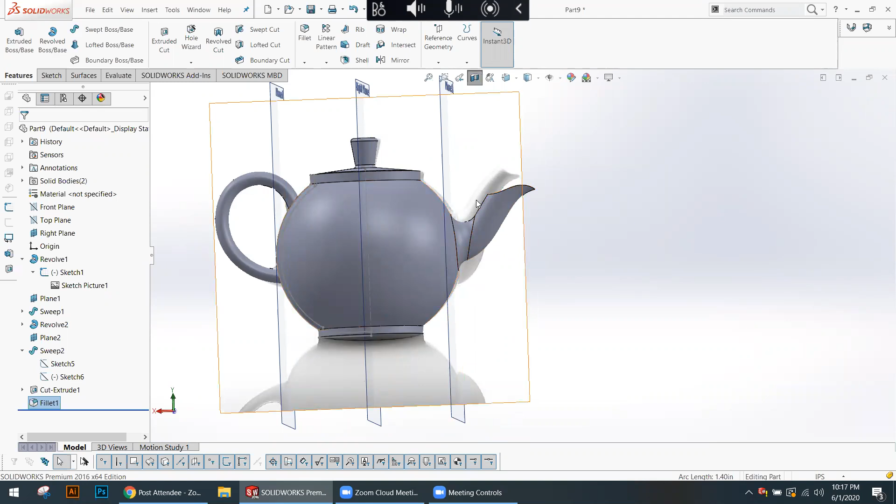Again, this is thicker. That's okay because we're using a completely different tool than that one. Also need to put fillets here. So go fillet. That's too large. And come down to maybe 0.25. That might be still too much. Maybe just 0.2. Say okay.

Right, that looks good. I go out of the section view and I hide my image. Okay, let's see what we're working with. I don't love this piece. That's okay. So we need to hollow out this thing, right?

So I'm going to use the shell tool. I need to see the other side too. So I'm using shell tool, and select this top here and this piece and see if that works. Show preview. Probably doesn't work because it wants to shell this whole thing. Okay.

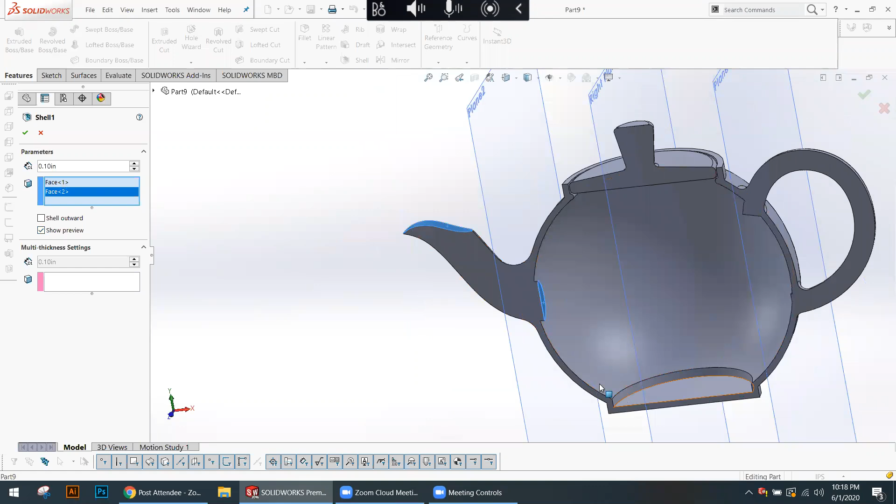So our other option is to make this sweep a thin feature. So we talked about it a little bit earlier. Let's see. It doesn't give us the option of a thin feature anymore, because we've already built it. Okay.

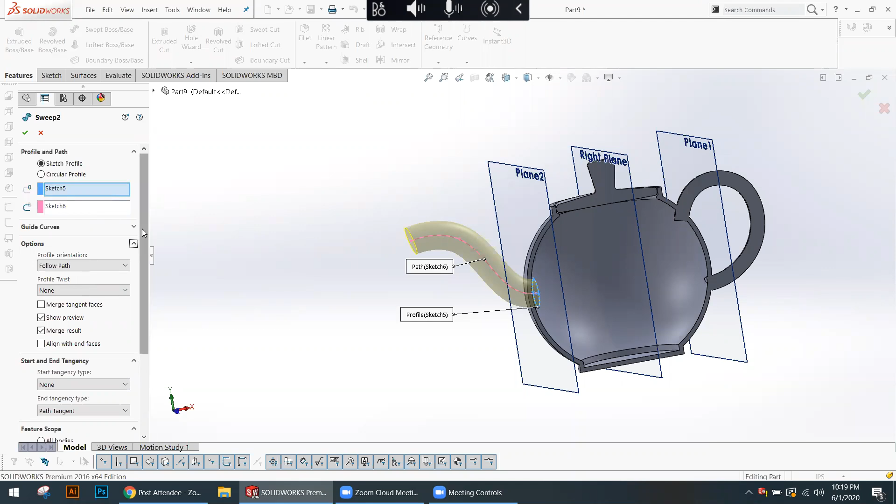There are two options we can do. We can do another sweep and cut this, so we use our sweep cut. And then for the rest of these, we do a revolve cut and clean up the inside. The other option is to change the spout to a separate part and hollow it out, use a shell.

So let's try the second option first, it's faster. I'm going to go and edit. Here where it says merge result, I'm going to uncheck that. When I uncheck that, it probably kills the fillet that we have here, but it basically makes this piece separate than that.

So here we go, you see how these will get affected, but we can go fix it. Go to the second one. So right now it doesn't know what it's cutting. I'm going to say you're cutting this piece. Sweet.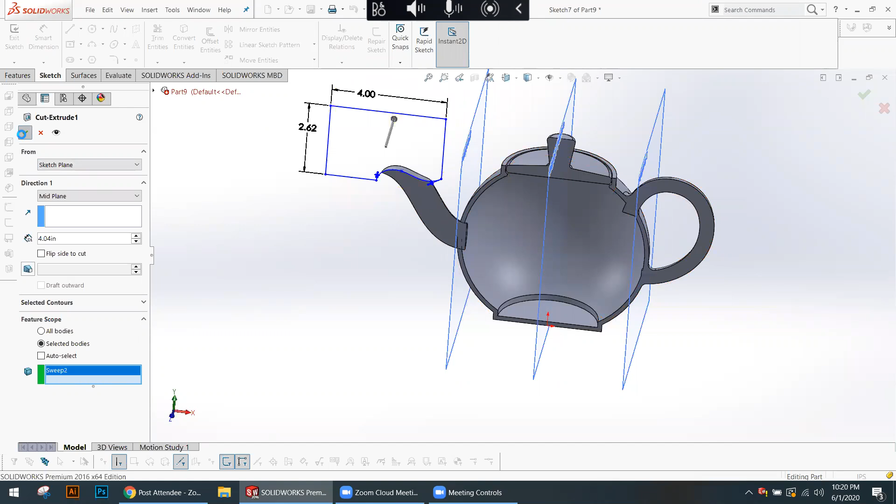Let's clear all, and then I'll say this piece, say okay, so that's fine. This fillet makes sense not to be working because now these are two different pieces, different bodies, so you can't put a joint thing there. So I'm just going to press delete for now. Say okay.

And use the shell tool, see what happens. Show preview. Select the top, see, and we'll select the side, so it's hollowing it out nicely. Say okay, all right, so we have this done.

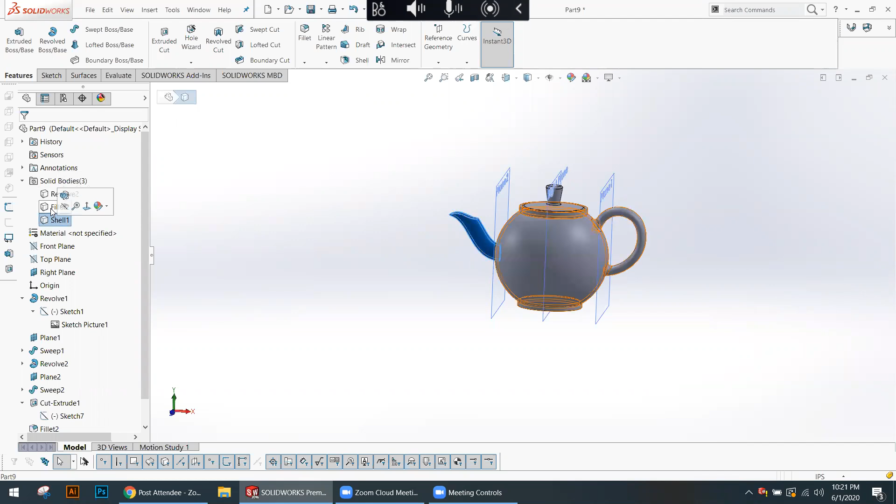Now we're going to combine these two shapes again. So as you can see, that's one body. This is one body, that's another. I'm going to hold shift, select both of them, right click, says combine. So I'm combining these two. Say okay, it says add. Say okay.

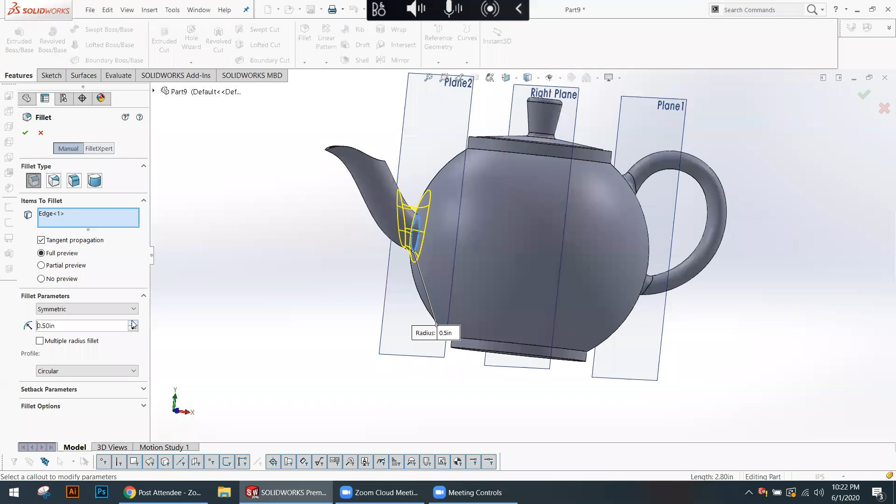Now I can come in, do my fillet. Okay. And after the fillet, so I'm going to do a tiny fillet here. 2.1, let's see if that works. That's too big, 0.5. Not bad. Okay.

Also this top part, I could have done it all at the same time, which I probably should have. There we go. That.

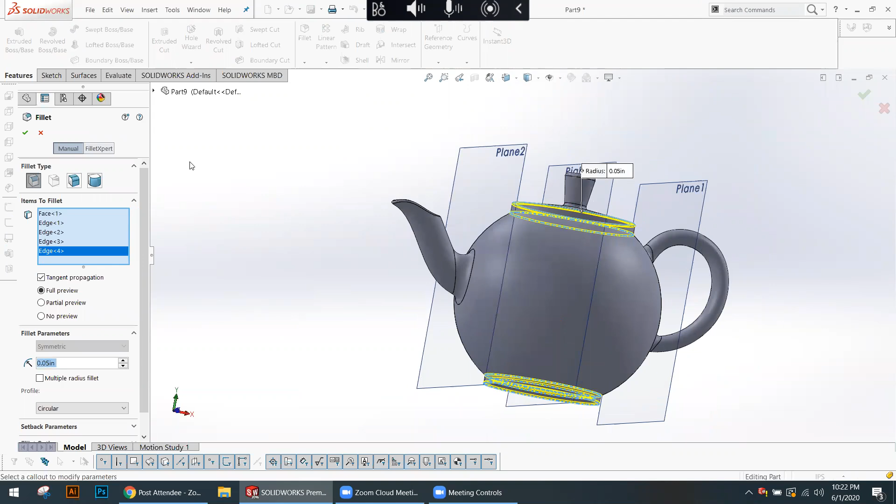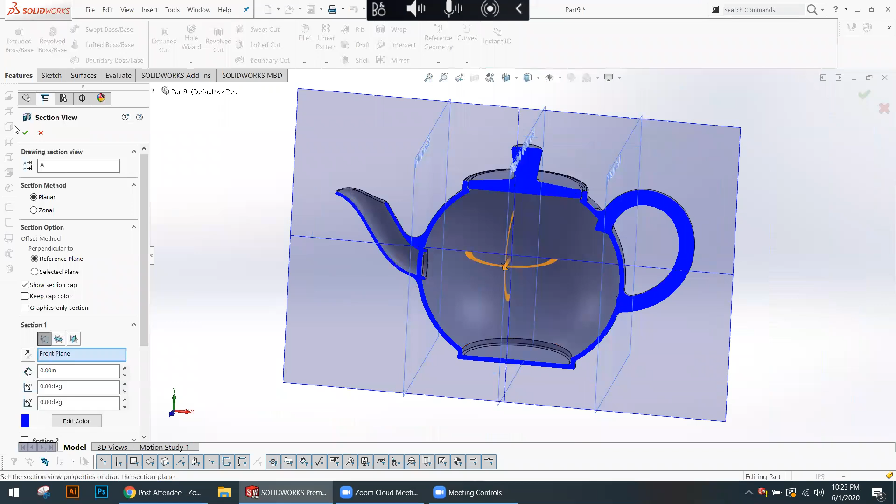Right, now the last piece, we have extra pieces here and here. We need to run a cut revolve on the inside and make sure we make an opening here, okay? So let's use this, say okay. Then go back to the sketch, make it show. I don't want to be in it, I just want it to show. Here we go, okay, it's showing.

Now we go to the front plane. Say sketch. Right, so this time we're trying to use this inner line to cut the whole thing, and it's going to be a revolve. So we use our center line, we put it down. And we know this is what we want, the line we're looking for.

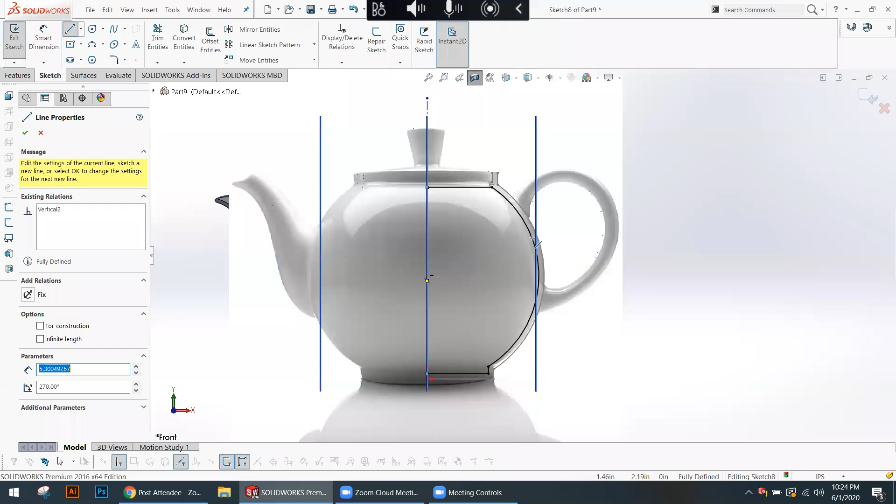So we're just going to select this, hold shift, select that and that. This is from the other sketch, but we're going to use a tool to bring it into this sketch. The tool is called Convert Entities. When I click that, it makes these black, so now these three lines are in my new sketch. All I have to do is close this sketch. So here you guys see it's closed.

And we use this to do a revolve cut. There we go, revolve cut. Okay. So right now it will get rid of these excess parts that were going in from the handle and from the spout, but the picture is kind of covering it, so let me see if I can turn off the picture so you guys see what's happening.

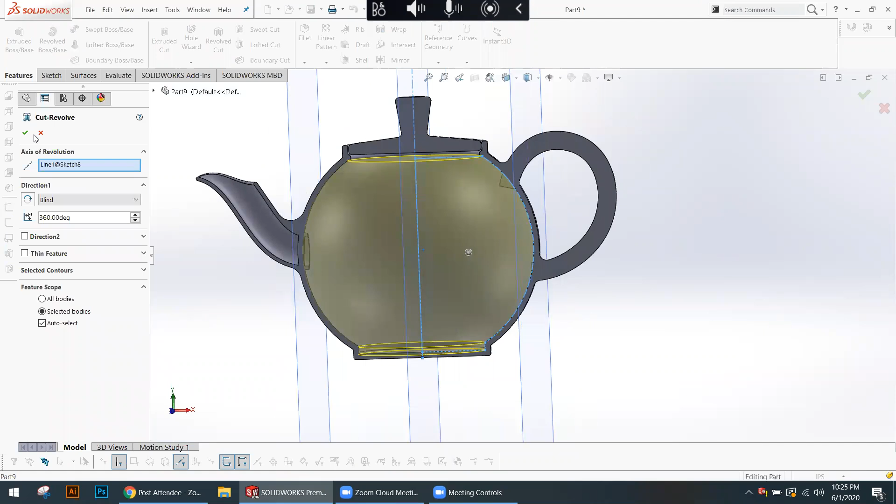Okay, here's our sketch, we'll do a revolve cut again. You see it's taking that out, taking this notch out, it's taking that little thing out. Say okay. That looks really smooth, all we need to do is open this.

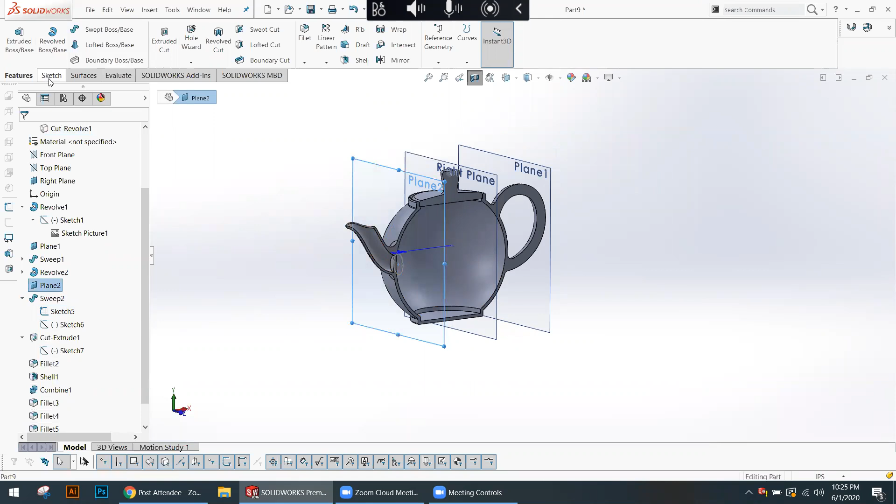So I'm just going to do a sketch on plane 2. I can even use the sketch we had on the sweep, just going to say show. I go to plane 2, do sketch, select, okay, select this, go convert entity, see, convert. And I think it did.

So we're selecting this, convert entity. It shows the signs, which means it's already done it. So I'm going to just see if it will work. Oh yeah, it was already there, so I just did not notice it. So here we go.

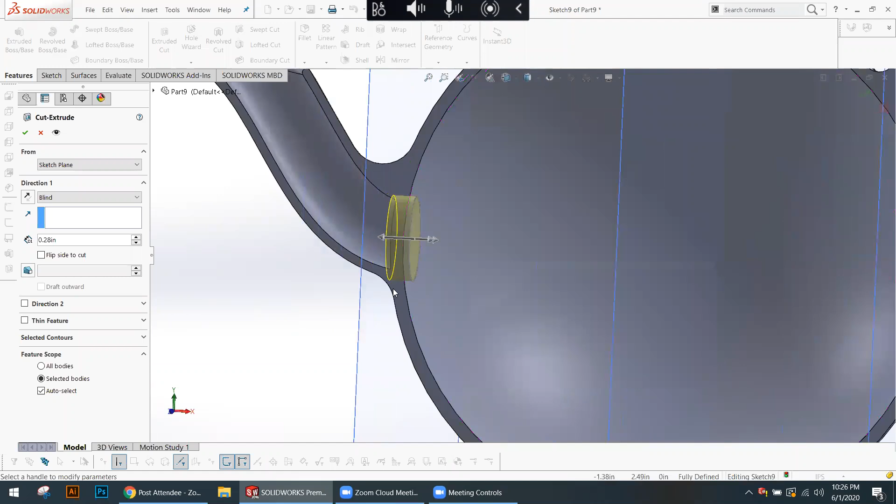So this is cutting straight. I don't want to cut this edge and make it thin, so I'm going to use the draft, we'll narrow it a little bit. Not too much.

Now that I think about it, if you had made this solid in the beginning and had that solid, we could have shelled the whole thing together, and that would have been a lot faster way to build than this way. But we never know until we do it and make the mistakes. So here we go, cut.

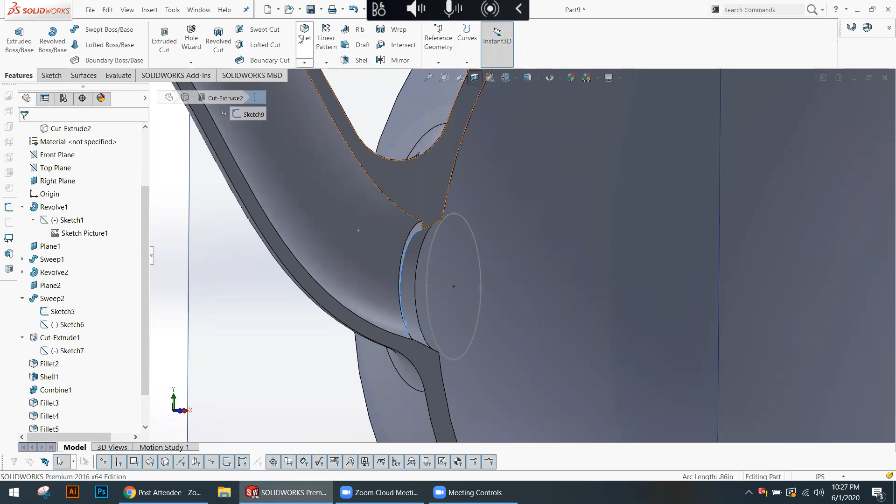Okay, I'm going to fillet this edge so it doesn't look like that. Okay, see, 0.1 maybe, too much. 0.05, this is on the inside, so you will not see it, but still, it's nice to keep it smooth.

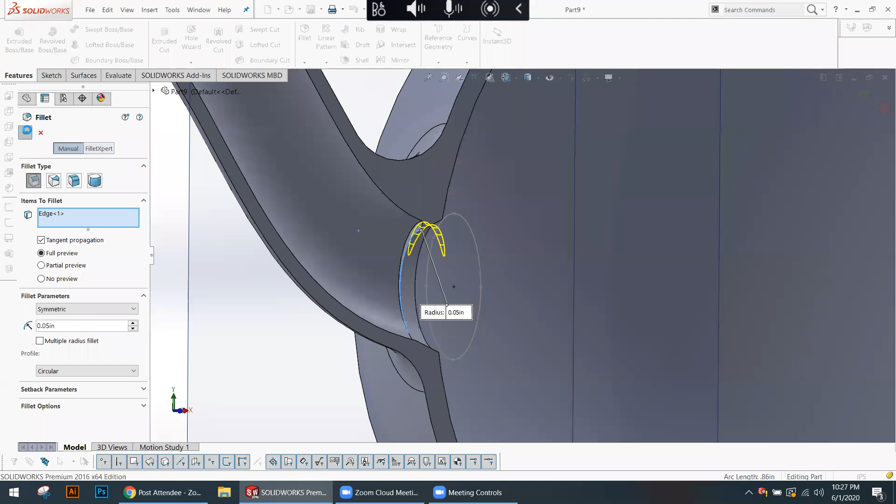Okay, so also we can fillet this one if we wanted to, doesn't matter, it's on the inside. Look, all right, here's our kettle. Looking through this.

Very good. At the end, make sure you have two bodies, you have the top and you have the pot. Best practice is to hide all of your planes so you have a clean product. Also your sketches, right click and hide that too. Right, we are done.

Make sure you save. Save as teapot.